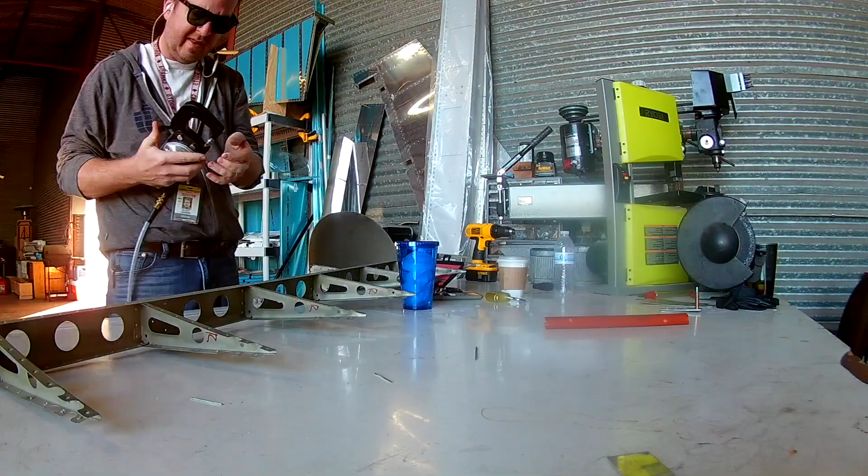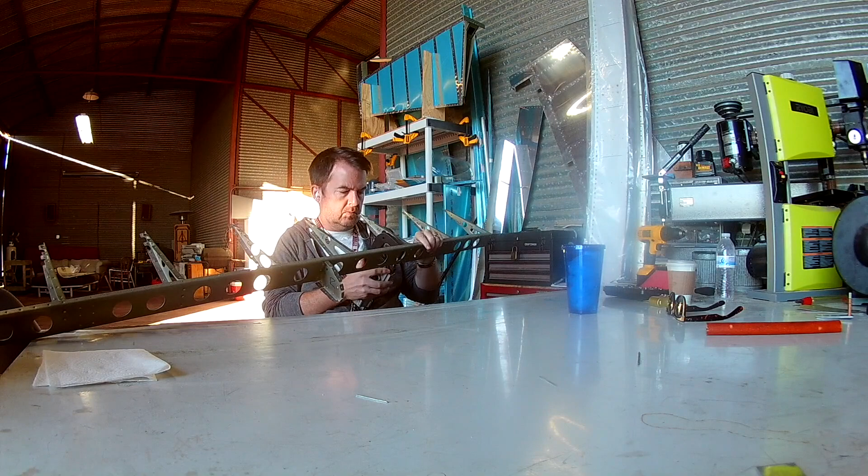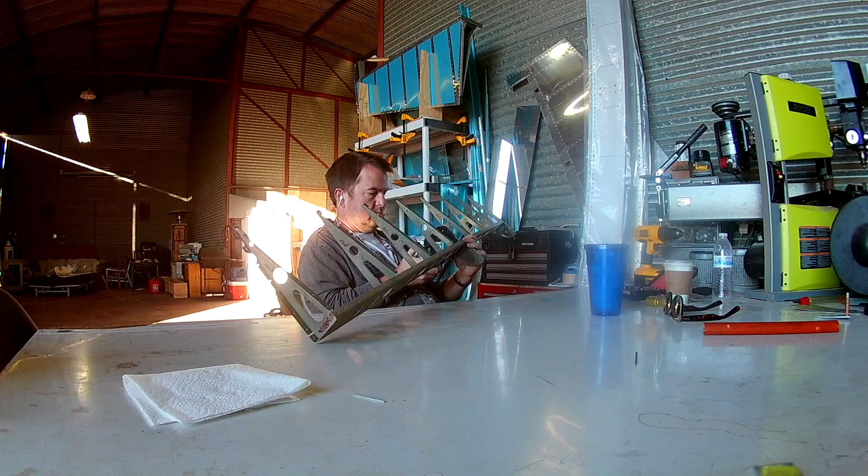One of the things I'd forgotten to do - not completely forgotten - I forgot to dimple the spar of the left flap. Not everywhere, because I had dimpled where the ribs were going, but I hadn't dimpled anywhere else. Why? I don't know. Anyway, just doing some post-riveting dimpling, and everything was fine.

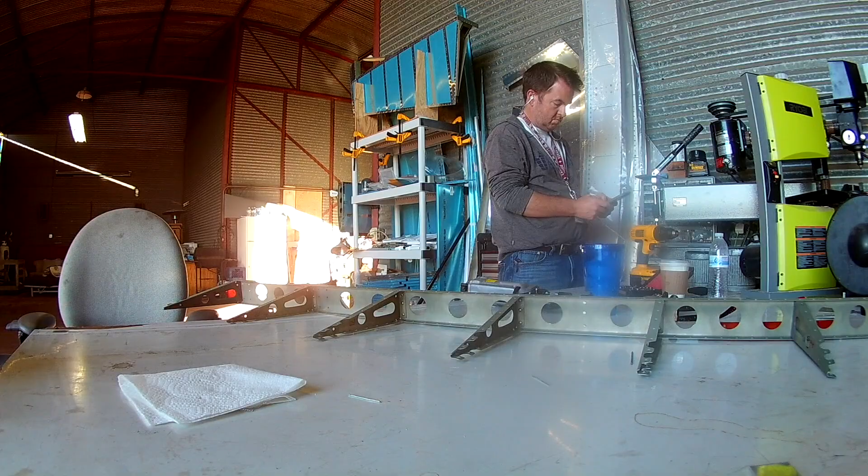The very next thing you do after the ribs is start putting on the doubler pieces, both of the hinges - well, it's not a hinge, but I'm pretty sure that's where you mount it to part of the wing, or I think a control rod.

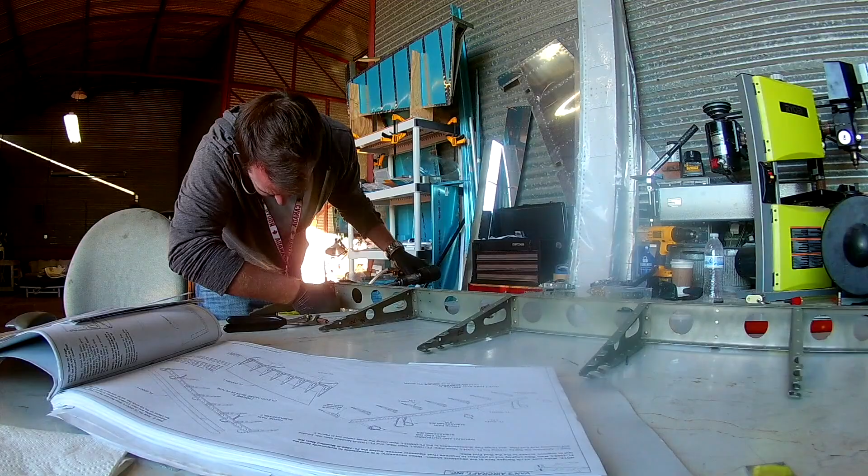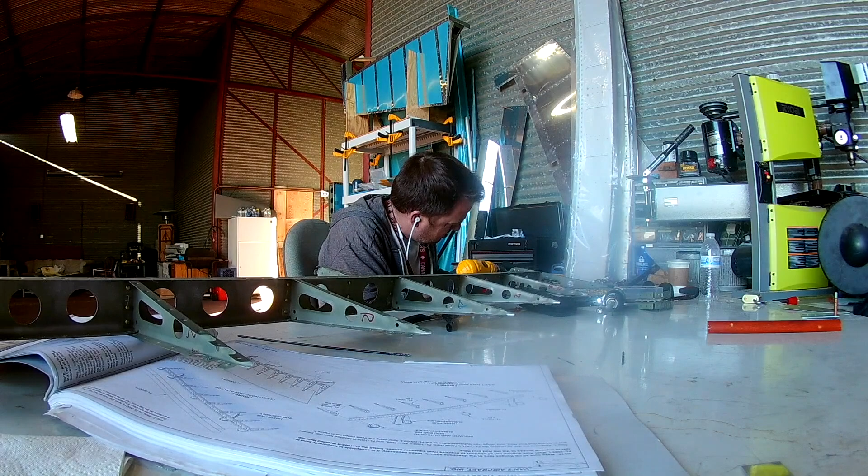Here you're going to see me make a mistake, and thankfully I stopped myself before I screwed it up. Again, mirrored pieces - the two main hinge brackets you put on, the ones that extrude from the bottom, those are symmetrical. You can't really screw those up. If you accidentally put one on the left of the inboard and the outboard, it'll probably be perfectly fine.

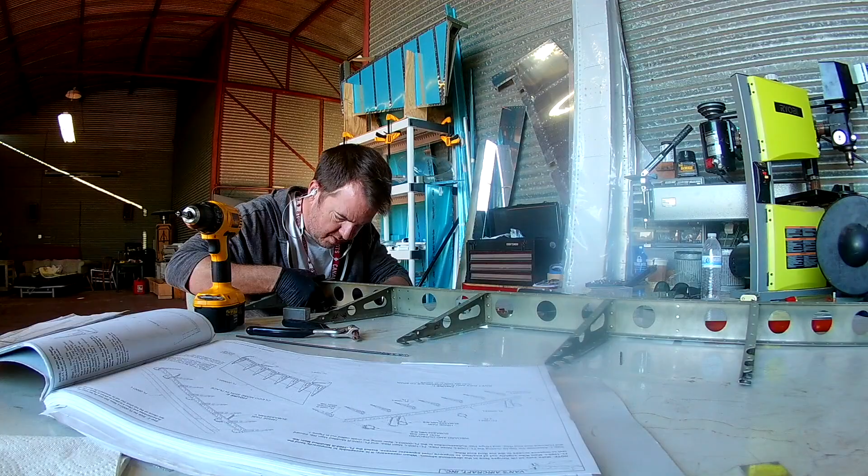However, the attach bracket - that's the two small ribs with the two small doublers - those are keyed, meaning they're not symmetrical. On the left flap, it's the left front rib and doubler combination that you put a nut plate on.

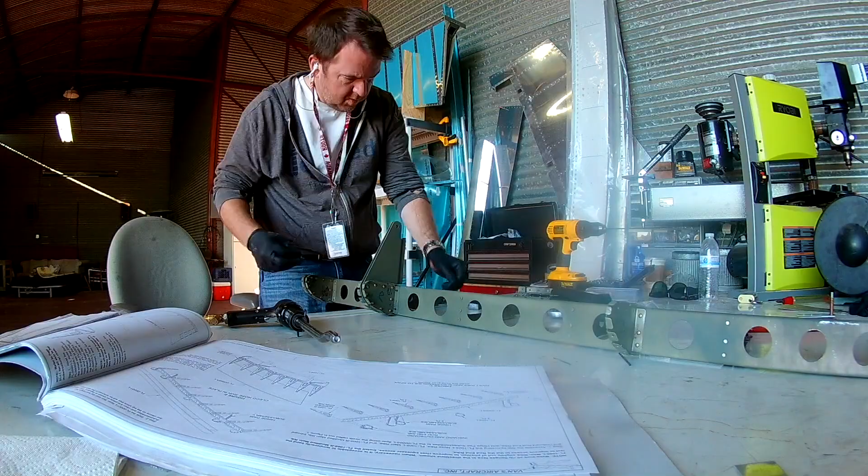Because of the nut plate, that needs to be on the inside of the flap. So if you do the left for the left flap, you need to do the right one for the right flap. I didn't - I just put them both on the left, because why wouldn't I?

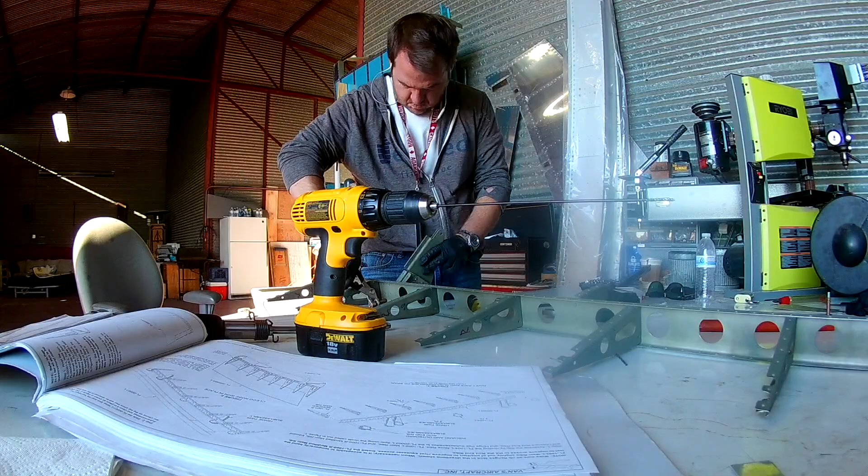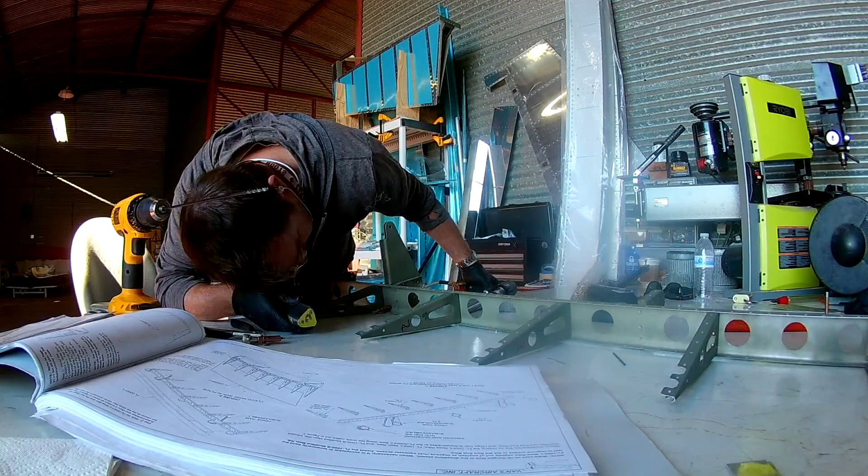Anyway, it was a simple drill-out. I just drilled out the two rivets that hold the nut plate on. Did them pretty cleanly, I might add - didn't even mar or scar up the nut plate at all, so that was very good. I did a test fit with a screw afterwards, and it fit perfectly fine.

And then, of course, I'd forgotten to dimple the leading edge. Okay, not really forgotten, I just hadn't gotten around to it. One thing you learn in plane building is you don't really forget something unless you can't go back and fix it. Actually, no - if you have to fix it, you've already forgotten. If you don't have to fix anything, you can just say you hadn't done it yet, like this. As long as I hadn't tried to put the skin on and rivet it in place without it being dimpled, then I couldn't call it a goof up.

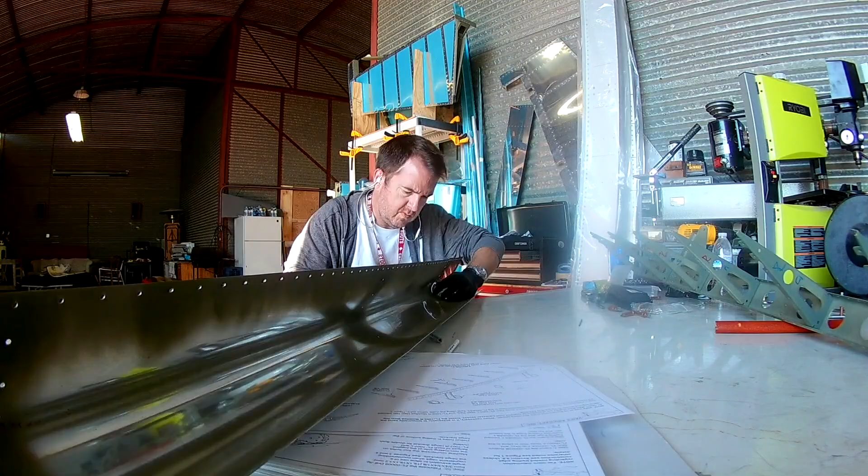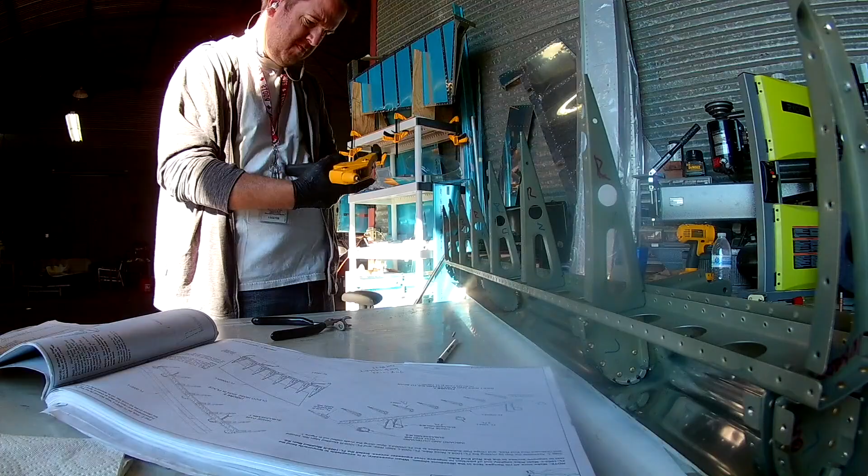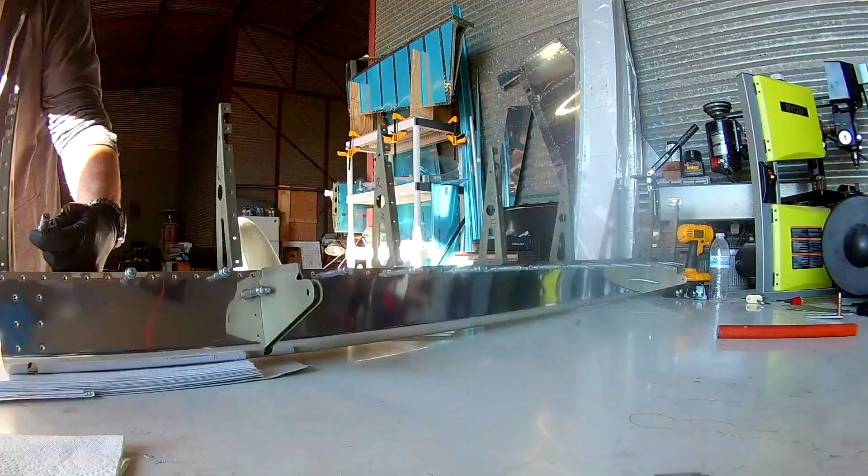Here I'm using the pop riveter and the close quarters dimple die set. That's the die set you use with a steel mandrel - which is just a fancy word for nail - to make the dimples, because I don't have anything with a throw long enough to get to the final holes near the very nose tip of the skin.

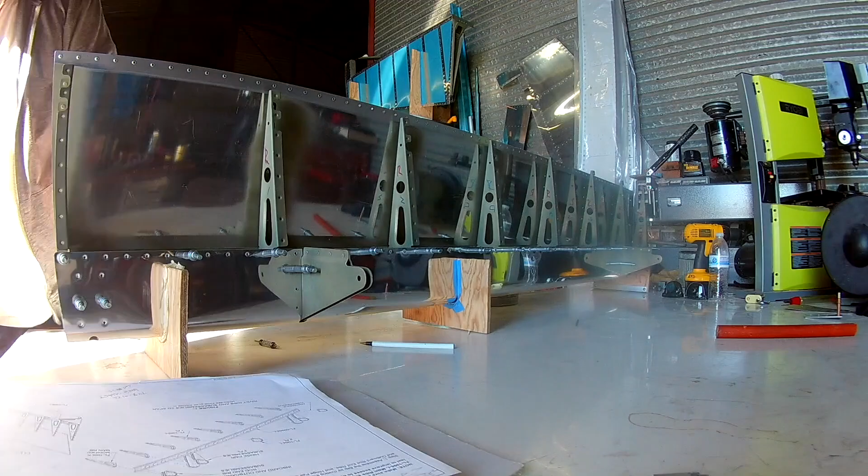Once that gets into place, you put the skin on and put it in a cradle, and it kind of forms that skin in place. You wrestle the top skin in place, and then you start to rivet it on.

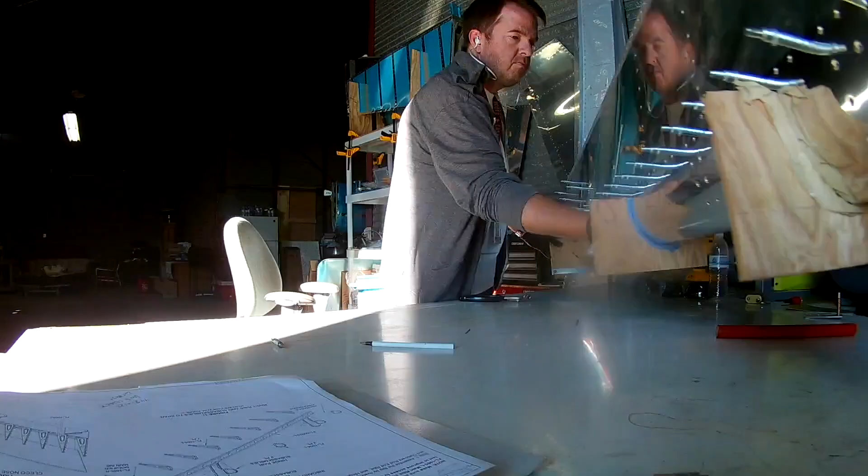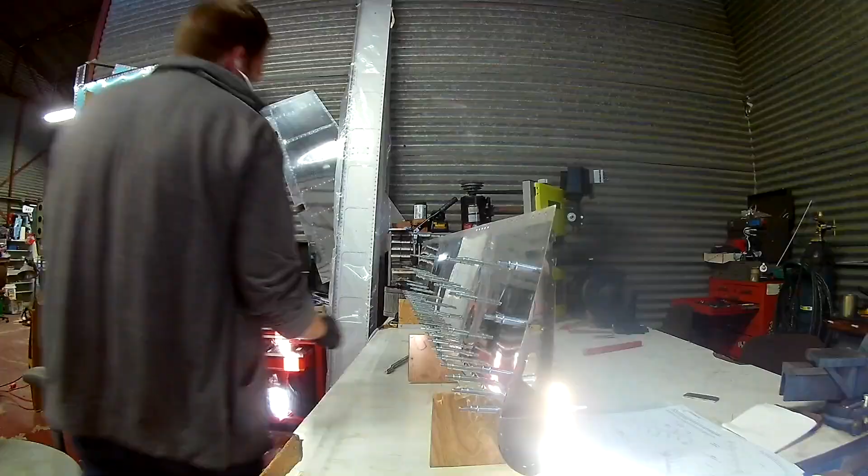Yeah, it was very bright that day. I had to close the door of the hangar pretty much all the way, because in San Francisco, our summers are in October.

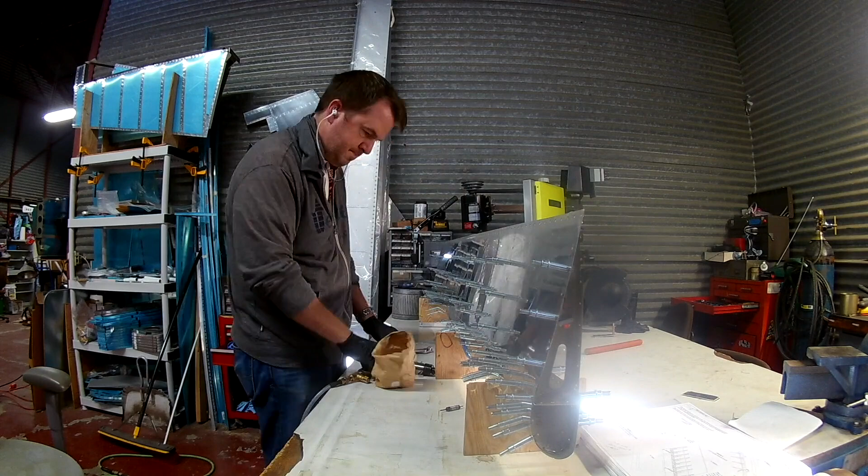So this is just like last time. I'm riveting - this is the riveting of the leading edge, the top skin, and the main spar, and the rib flanges, main rib flanges - using 3.5s and 4.5s 426s, the little flat heads, countersunk.

I got my little 1x1x2 inch bucking bar I use in the back. Makes very short work out of the whole thing. And as usual, I start from the middle and work my way out towards the edges.